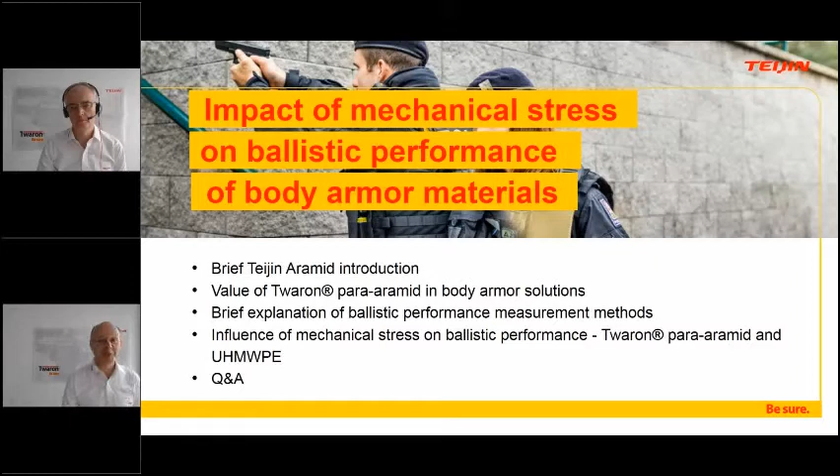Let's give you a brief overview of what Teijin and Teijin Aramid is. Teijin Limited is a technology-driven Japanese group listed on the Tokyo Stock Exchange. It's more than 100 years old, with more than 20,000 employees, and generated a revenue of about $8 billion in the last fiscal year. Teijin Limited focuses on two areas: the first is healthcare, and the second is materials. Materials being resins, composites, plastics, and fibers. When we talk about fibers, it's polyester, carbon, and different aramids.

This leads to Teijin Aramid, a 100% subsidiary based and headquartered in the Netherlands. Teijin Aramid has 1,800 employees working from 8 sales offices worldwide. We have 6 production facilities in Europe and Asia, and 5 R&D facilities globally. Teijin Aramid is focusing on 4 main markets: safety and life protection, you heard about that before, automotive, industrial, and aerospace.

We have a portfolio of 4 different high-performance products. Technora, a para-aramid, is produced in Japan. Then we have Teijinconex, a meta-aramid fiber produced in Japan and Thailand, used in flame and fire-resistant applications, for instance military pilot coveralls, tank crew garments, police anti-riot suits, firefighter garments and so on. Then the third product is Endumax, an ultra-high molecular weight polyethylene used in ballistic applications. And then Twaron is a para-aramid fiber, produced in the Netherlands from monomer to filament, which is quite unique. Twaron has been commercially available since 1986.

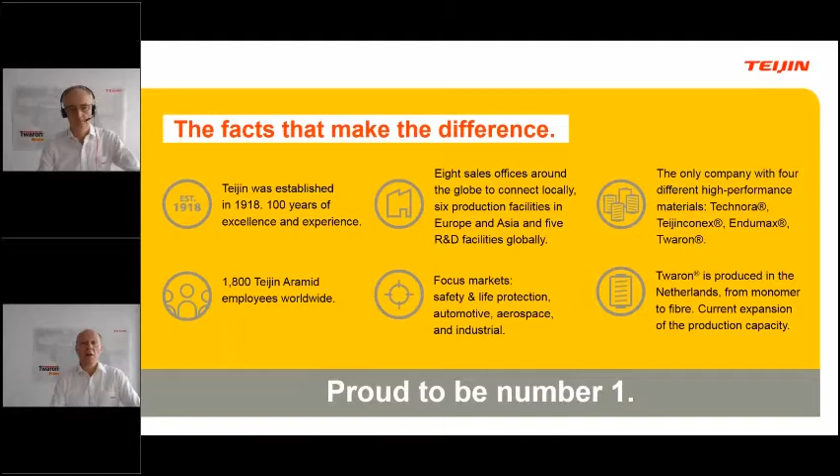The production capacity has been increased, and right now we are increasing the capacity by another 25%. Twaron is really proud to be number 1. Over the last 3 decades, Twaron has proven its reliable performance in soft and hard ballistic applications.

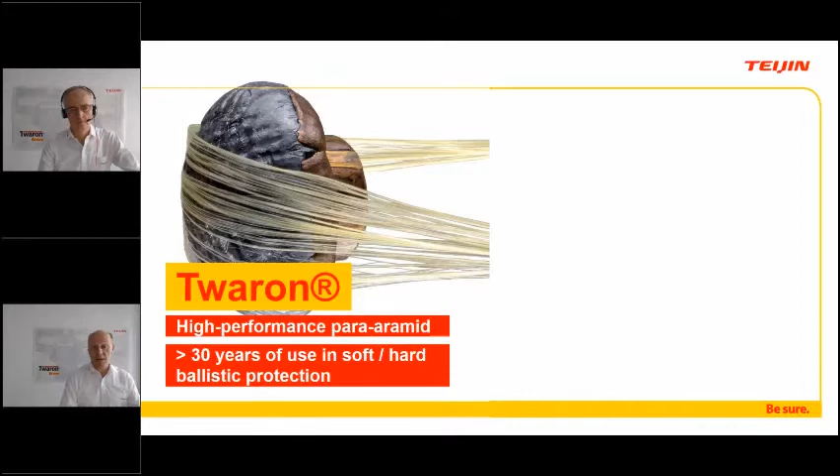It has a combination of unique properties, and I'm talking here about a few. It is extremely strong. If you compare Twaron with steel, for instance at the same weight, at equal weight, Twaron is 5 times stronger than steel. Twaron has a very good, stable performance over many, many years, and it is very resistant against heat, cut, and most chemicals.

This combination of properties makes Twaron an ideal material for body armor. It's this lightweight and high flexibility which gives the wearer, such as police officers and soldiers, a lot of mobility and comfort. And if you put together the lightweight, the flexibility, and the stable performance, you have the key criteria which create a lot of acceptance by the wearer, that's to say the police officers and soldiers wear their body armor. And we all know, only body armor which is worn can protect.

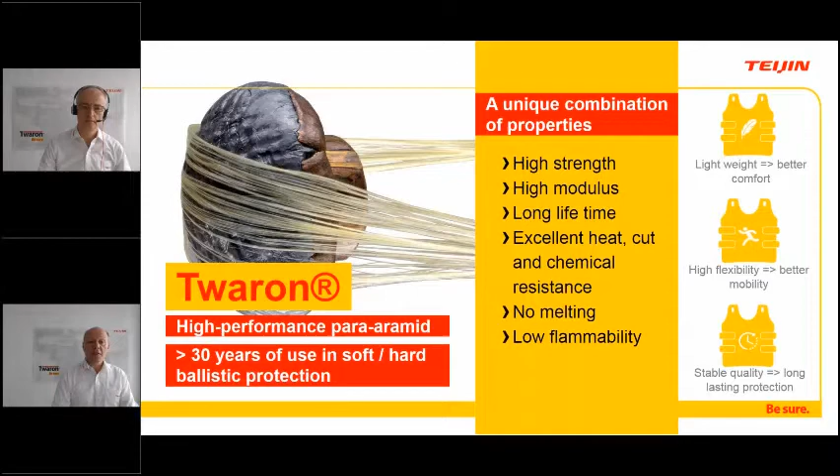After this short overview, I would like to give now the platform to Christian, who will cover the technical part. Christian, the floor is yours.

Thank you very much, Nicola, and hello everybody. I will first start giving you an overview about the test methods we at Teijin apply and the analysis tools we use in order to judge the ballistic performance of materials, but also to judge the safety margin of ballistic constructions.

Just a second. Okay, here we are.

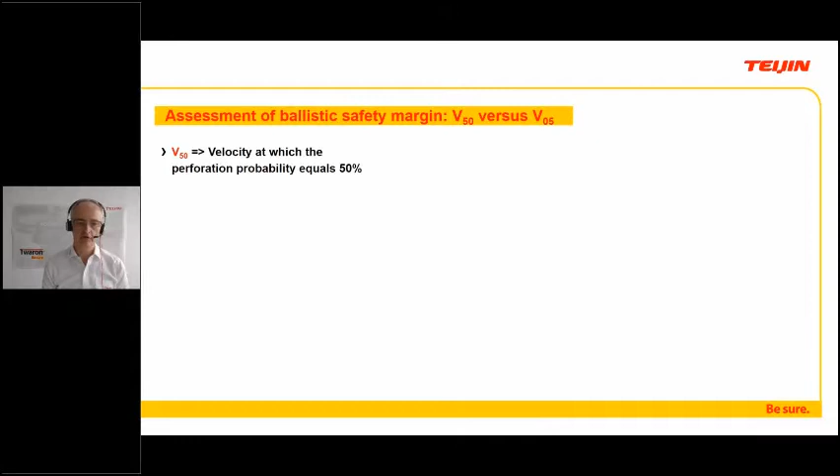Most of you have already heard about terms such as V50. For those who haven't, V50 is the velocity at which the probability for a complete perforation of a projectile impacting a ballistic construction is 50%. This we consider an ideal measure to judge the pack-specific energy absorption, and it allows us to compare the ballistic capability of different materials against each other.

Some people would also use V50 as a value to judge the safety margin of a ballistic construction, but that's not what we do. That's not what we consider appropriate. For safety margin of a ballistic construction, we consider the V05 to be the better value. The V05 is the velocity at which the probability for a complete perforation, so that the impacting bullet would perforate the armor, is only 5%.

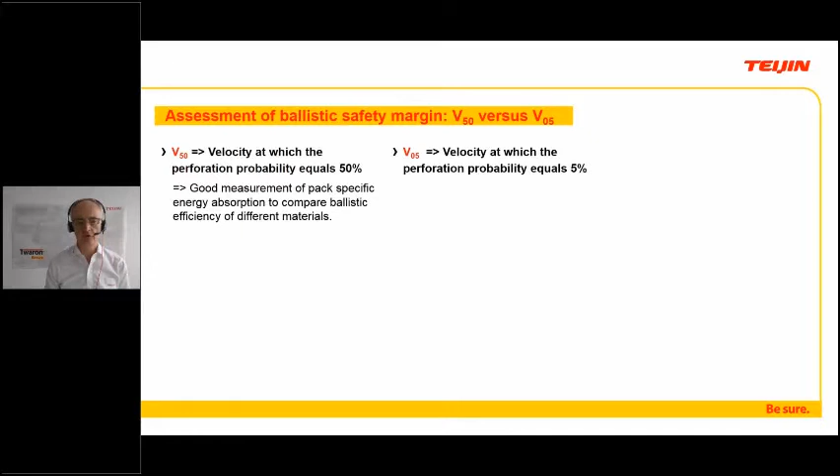In order to have a good safety margin, or at least a sensible safety margin, we suggest, in line with what is written in the NIJ standard, that the V05 should be higher than the VREF max. The VREF max is the velocity specified in the test standard. As an example, the German police standard requires a 9mm bullet to be shot at 415 meters per second, with a plus tolerance of 10 meters per second. So the 415 is the reference velocity, and 425 would be the VREF max. So in order to have a sensible safety margin, your V05 should be higher than 425 meters per second.

So with this, we conclude that the V05 is a better indicator for the safety margin than V50.

In order to follow the presentation, there are a few other terms I need to explain, which I'm going to use. That is the VLCP, the lowest velocity at which full perforation occurred. Then there is the VHPP, the velocity at which the highest partial perforation occurred.

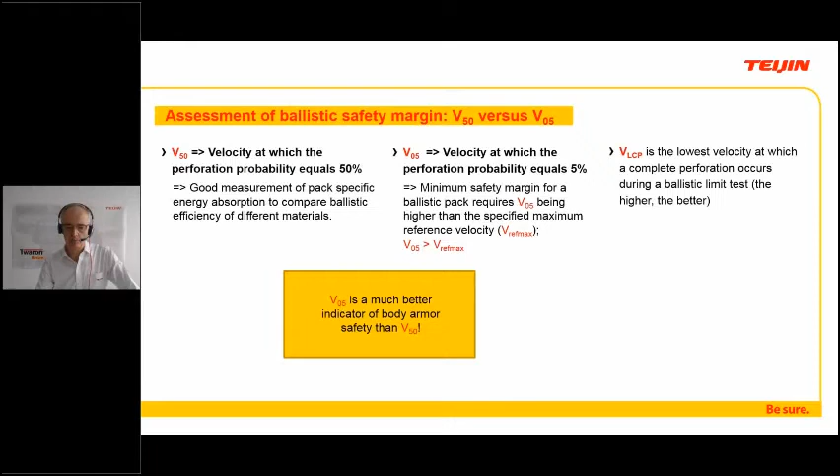Anna, if you can hear me, I have difficulties to navigate.

So the VHPP is the highest velocity at which a bullet has been stopped by the armor. And then there is a zone of mixed results, called ZMR, which is the difference between the highest stop shot and the lowest complete perforation.

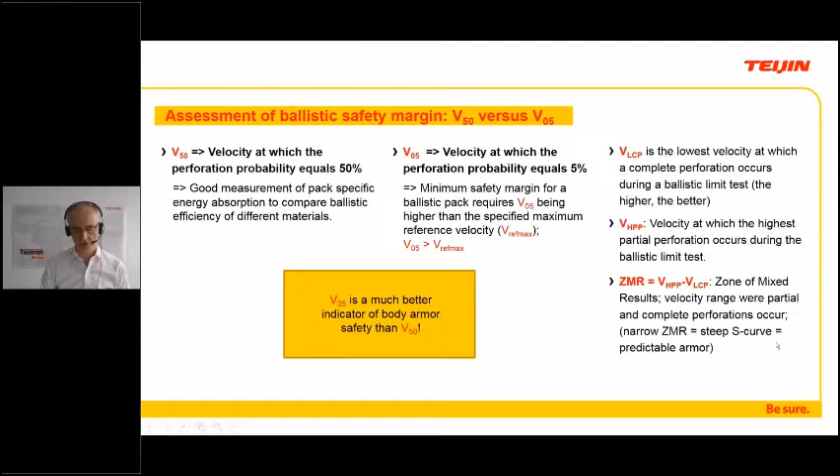In order to better understand, I'd like to illustrate this in a graph. On the x-axis, you see the velocity of the impacting projectiles, and on the y-axis, the perforation probability. The solid red line is your reference velocity, in case of German police 415 meters per second. The dashed line is your VREF max, which is 415 plus the tolerance of 10 meters, so the maximum velocity required by the standard.

If you now do a ballistic test, you only have two possible outcomes: either the bullet is stopped or the bullet is perforated. If you do multiple shots at different velocities, you would have a lot of bullets actually stopped by the armor, dotted in blue. Each blue dot here is one single shot, the stop shots are all dotted on the 0 line, and all the perforated projectiles are dotted on the 1 line.

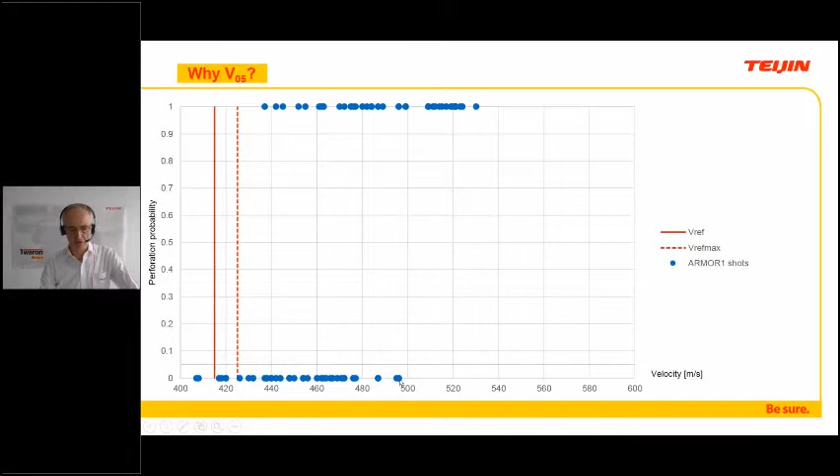In this example, shots were done from 410 to about 530 meters per second. Your highest stop shot has been around 495 meters per second, and your lowest complete perforation has been about 435. The difference between the two is your zone of mixed results.

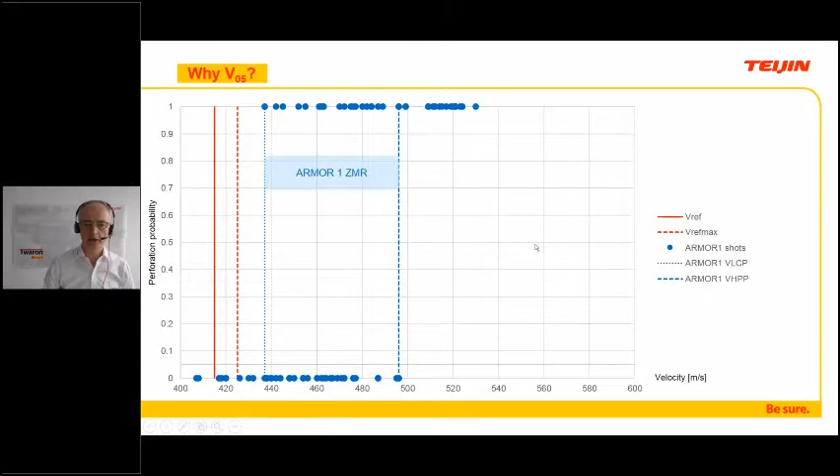What we can now do is, by applying a well-known statistical analysis tool called Logistic Regression, plot such an S-curve. This logistic regression is very suitable for such situations, and is also the system specified in the NIJ standard. From such an S-curve, you can derive different information.

The slope of this curve depends on the width of the zone of mixed results - the wider the zone of mixed results, the flatter your S-curve is. The quality of the S-curve depends on the number of shots you are doing - the more shots, the better your confidence in the S-curve.

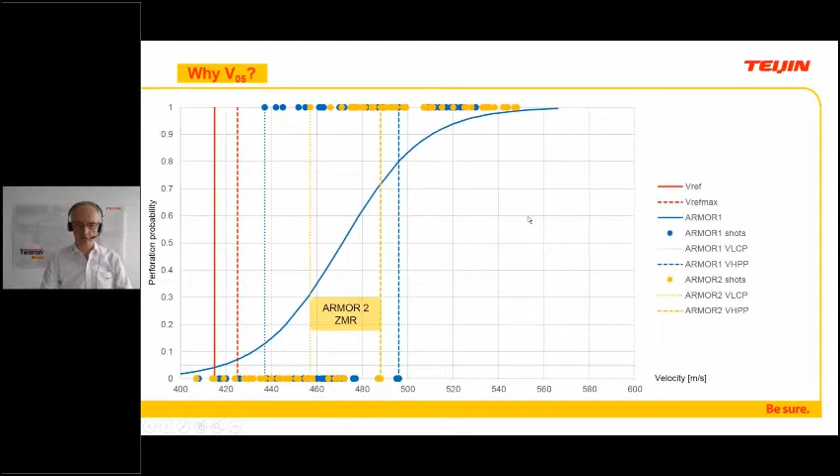Let's look at another example. In this case, we have yellow data points, and it all looks very similar. However, if you look at the zone of mixed results, you see that it is much smaller in this case, and as a consequence, the S-curve is much steeper.

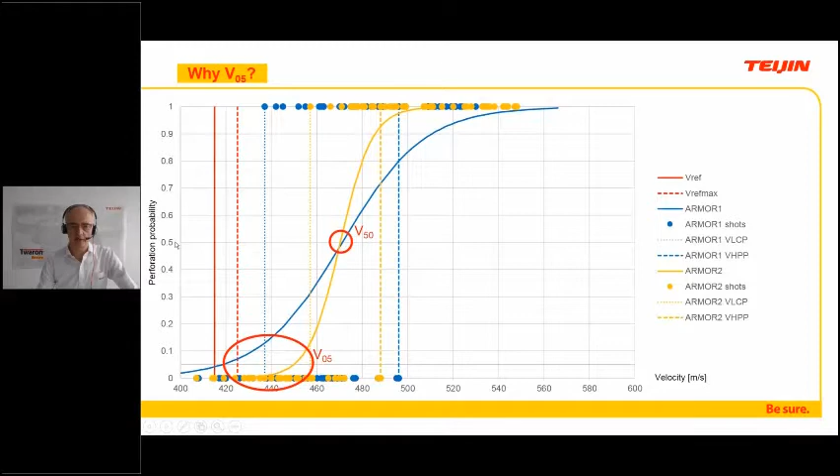So what kind of information can you derive from that? You can, for example, look at the V50, the velocity at which the perforation probability is about 50%. If you compare the two armors here, you would conclude that both are identical and have the same performance, because V50 is identical.

However, due to the S-curve, you can also look at the V05, and there you see, while comparing the two armors, a dramatic difference. In the blue example, the V05 is slightly below the VREF max, so you don't have enough safety margin. In the yellow example, however, the V05 is more in the range of 450 meters per second, substantially above the maximum reference velocity. So looking at the V05, you can see that the yellow example has a higher safety margin and is the better product for the person wearing the vest.

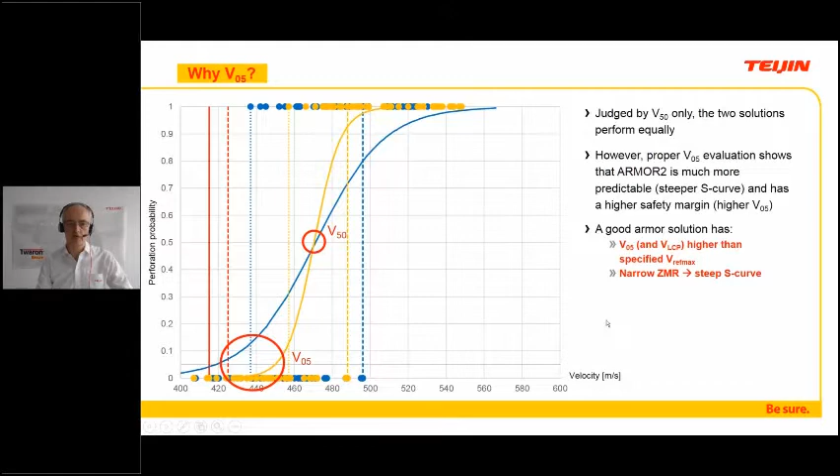Having all this in mind, we started to investigate and analyze the wear resistance, or the resistance against mechanical stress, of different ballistic materials. For this, we use the NIJ conditioning protocol, which asks to do a tumbling trial, a Tumbler test.

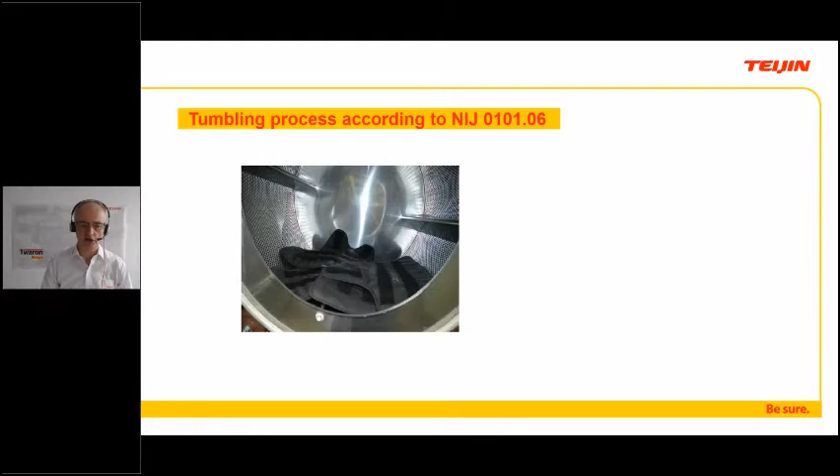So how does that look like? The Tumbler test is basically a kind of drum dryer where ballistic panels, a specified number of them, are filled in. The panels are, at least in our case, and I think that is standard, heat sealed in a pouch, and then additionally stitched in an outer garment in order to protect them as much as possible.

The panels are rotated in this drum dryer for 10 days, which is equivalent to 72,000 rotations. The conditions are 65 degrees centigrade and 80% relative humidity during those 10 days.

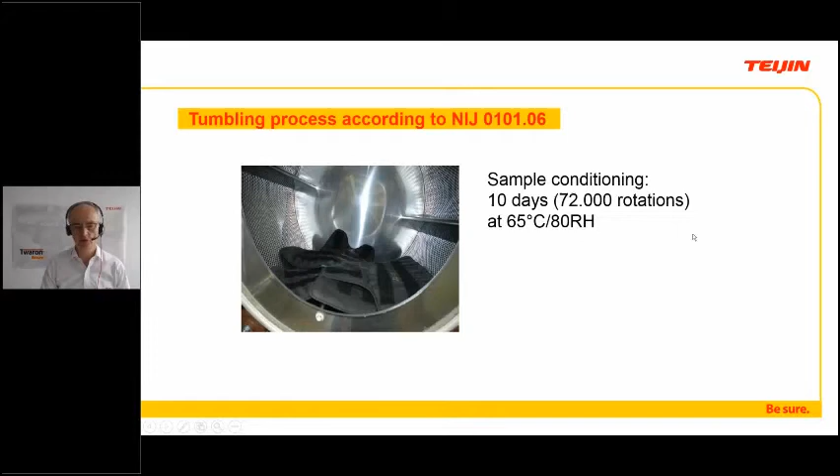So during the rotation, a lot of mechanical stress is applied, and this is how such a panel, in this case already removed from the outer garment, looks like after the 10 days of tumbling. You can see a lot of wrinkling and folding, mechanical stress has been introduced to the pack.

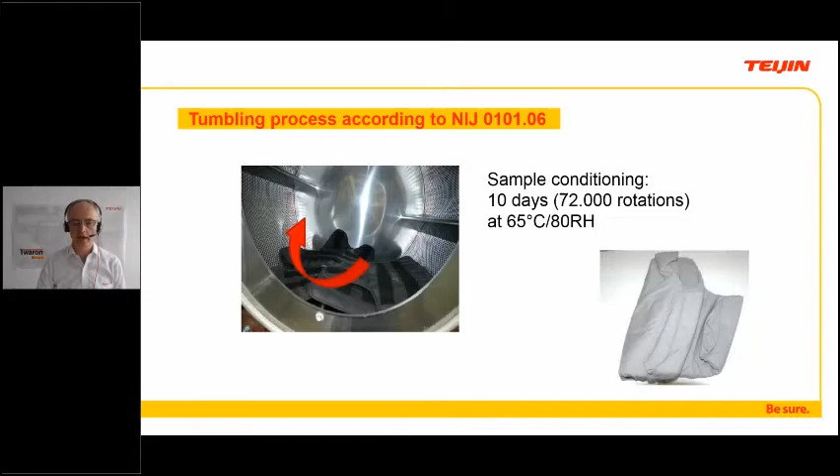What can happen, not necessarily does happen, but what can happen to the material, to the panel, due to this mechanical stress?

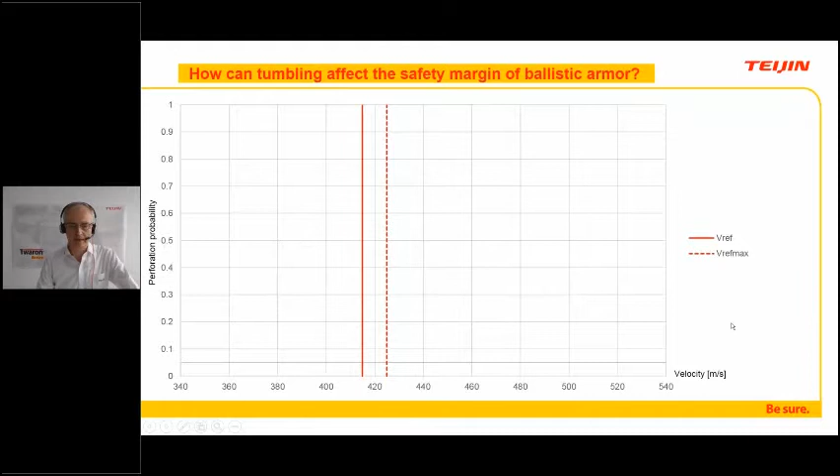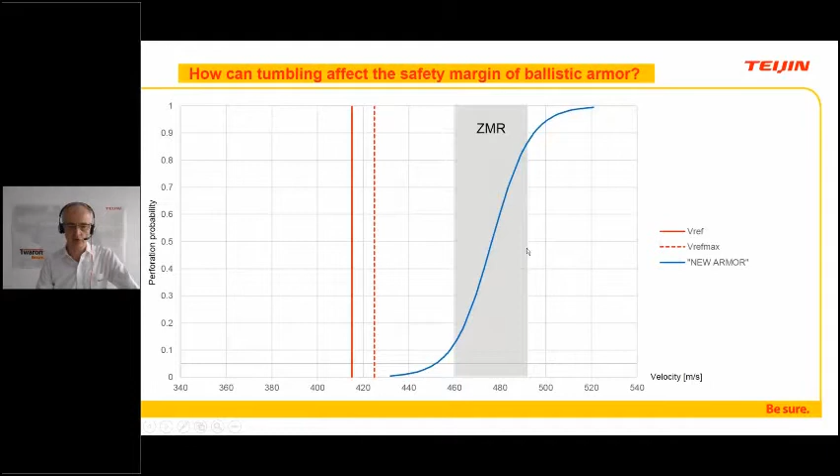This is a typical S-curve for a material prior to tumbling. You see a relatively steep S-curve and a small zone of mixed results. What we see from time to time is that this zone of mixed results substantially grows, because you happen to have lower velocity complete perforations here.

And if that is the case, then your S-curve after tumbling, which is now the dashed curve, substantially flattens, which means your V50 and your V05 substantially reduce. Not saying this has to happen, but this is what can happen due to the mechanical stress that is applied.

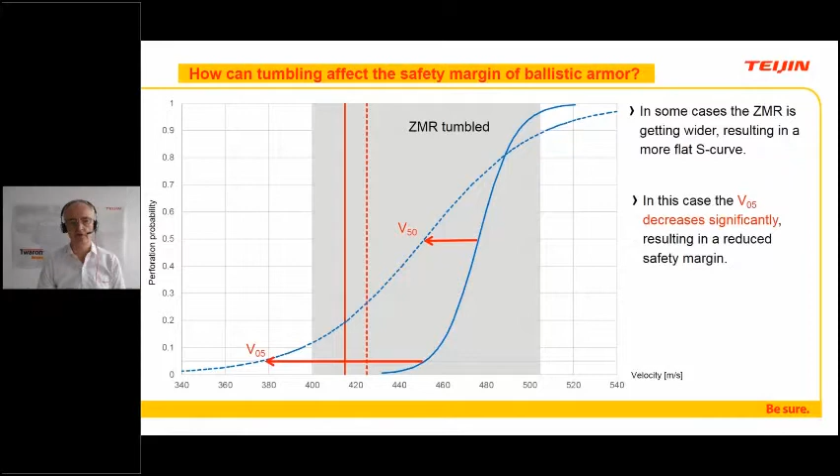Which materials did we actually investigate, according to this tumbling procedure? It was a Twaron woven fabric called CT612 - in this case we chose loom state fabric. We compared it with Twaron UD called UD25. And we included two types of ultra-high molecular weight polyethylene UD obtained from the market, both based on generation 3 ultra-high molecular weight polyethylene fiber.

Tumbling was done, as mentioned, in accordance with the NIJ 0101.06 standard. The ballistic test we did is an internal test method we described within Teijin Aramid. The projectile used is a 9mm DM41, a steel-jacketed 9mm round as specified by the German police, where the reference velocity is 415 meters per second and the VREF max is 425.

The analysis method we applied is logistic regression, as specified in the NIJ standard. In order to come to a good quality result, we tested each construction with 80 shots, using 10 panels with each panel shot 8 times. Based on our statistical analysis, we are convinced this gives us a good estimate on the V50 and also on V05 with acceptable confidence levels.

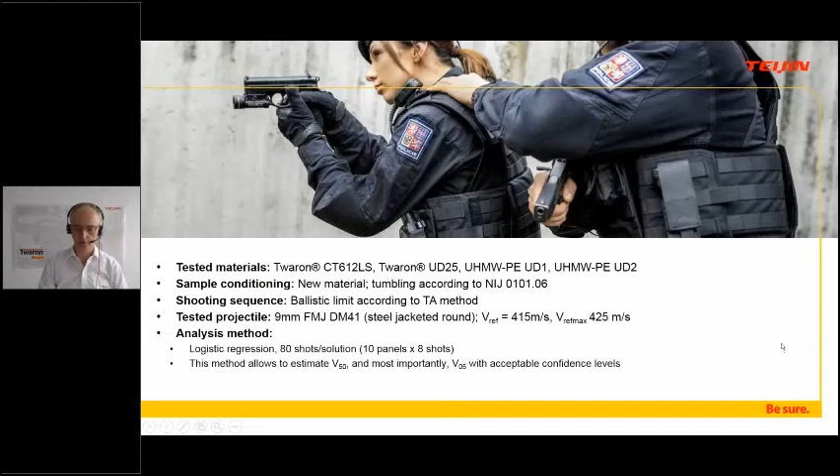Some extra information on the panel constructions. The CT612 loom state, a 125-gram plain woven Twaron fabric, was put in a 4.5 kilogram per square meter panel and has been quilted. The Twaron UD25, a 2-ply UD with 112 grams, was put into a 4.24 kilogram per square meter panel and has been corner tacked.

Both of the ultra-high molecular weight polyethylene materials we used were 2-ply materials put into about 3.9 kilograms per square meter construction and also were corner tacked. So you see some difference in the panel construction - while the Twaron woven fabric has been quilted, the UDs have been tacked.

This is because those are the most common ways to connect the layers when an integrator, a vest manufacturer, is producing a vest. For woven fabrics, especially loom state fabrics, it is very common to have them quilted, while for UDs quilting is not common at all, because it would dramatically stiffen up the pack, often to an unacceptable level, and would also have some impact on ballistic performance. So the panel constructions we used are typical to what is used in the industry.

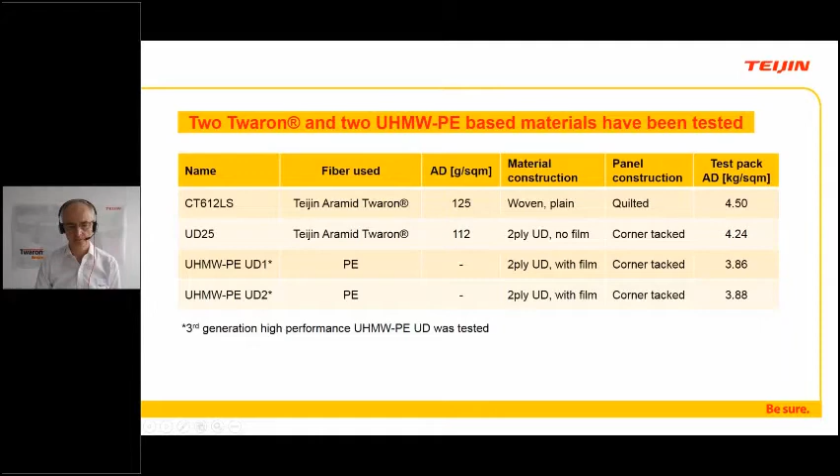So how do the different materials look like before and after tumbling? Two examples: here we have a comparison of the woven Twaron panel, new versus conditioned, so after tumbling. You see that due to the tumbling there's quite some stress provided to the panel, which you can see especially in the corner area, but the fabric construction is still very well intact.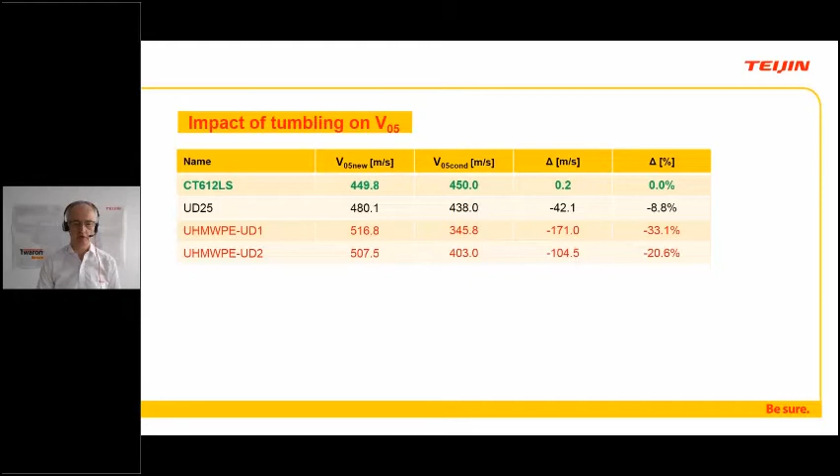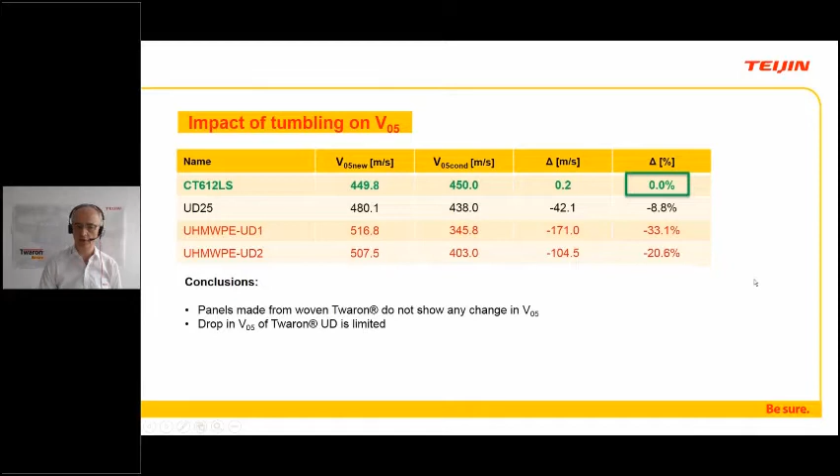Same analysis we did for the V05, the velocity where the probability for perforation is 5%. Again, in the case of Twaron woven fabric, the ballistic performance did not change at all, no impact due to tumbling. In case of the Twaron UD, a somewhat more pronounced drop in the range of close to 9%. And in the case of the two ultra-high molecular weight polyethylene UD materials, we saw a drop in V05 between 20 and 33%.

And even more so, the safety margin was substantially reduced, even below the reference velocity. You remember the reference velocity was 425, and the constructions we used, which are not certified solutions, had a V05 substantially above it, but suddenly they are substantially below the V-ref max.

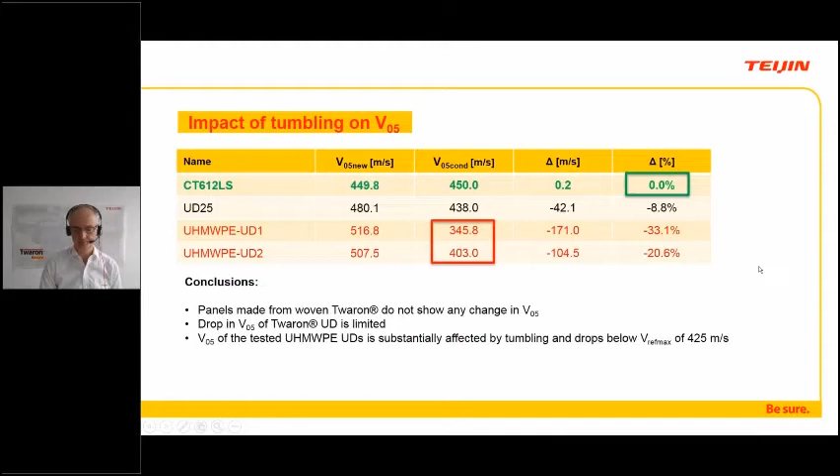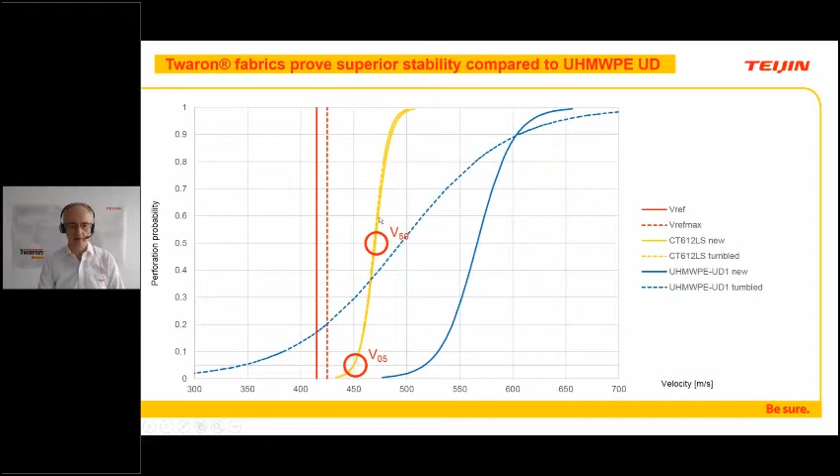In comparison, the woven Twaron panel has a steeper S-curve prior to testing. More importantly, the dashed line now, you can hardly see it because it is so close to the original line. The dashed line is exactly on top of the untumbled, unconditioned material. So the V50 and the V05 have not changed at all.

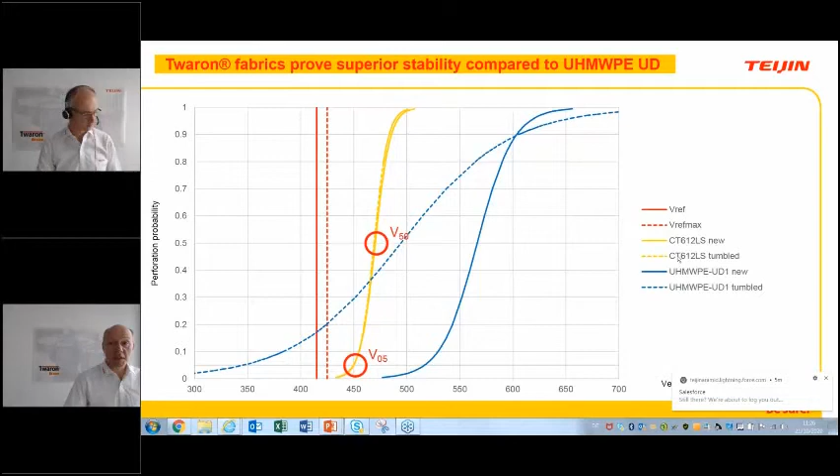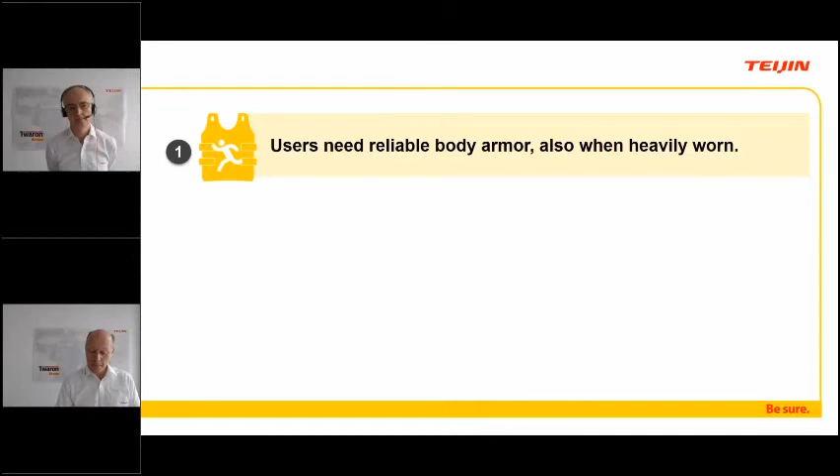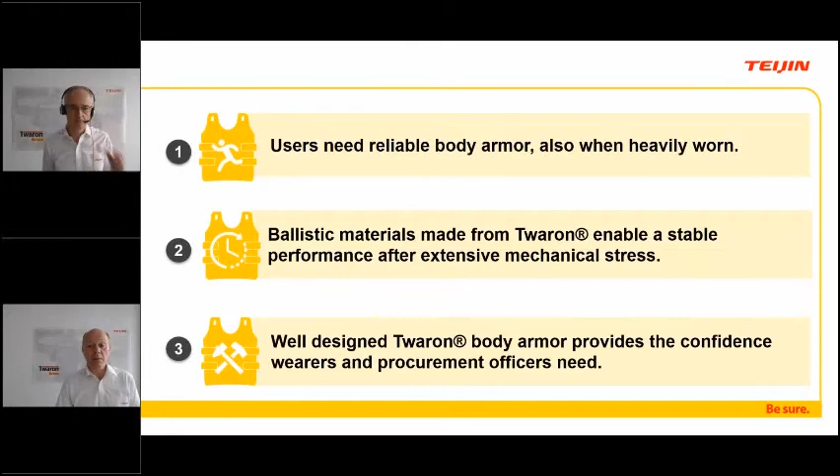Summarizing the results of this comprehensive program, we can conclude that wearers need reliable body armor. That's to say, soldiers and police officers need body armor which still performs when heavily worn. This comprehensive test demonstrates that ballistic materials made from Twaron enable stable performance even after extensive mechanical stress. So well-designed Twaron body armor provides the confidence wearers, but also procurement officers, are looking for. Twaron is a material of choice for reliable, comfortable body armor.

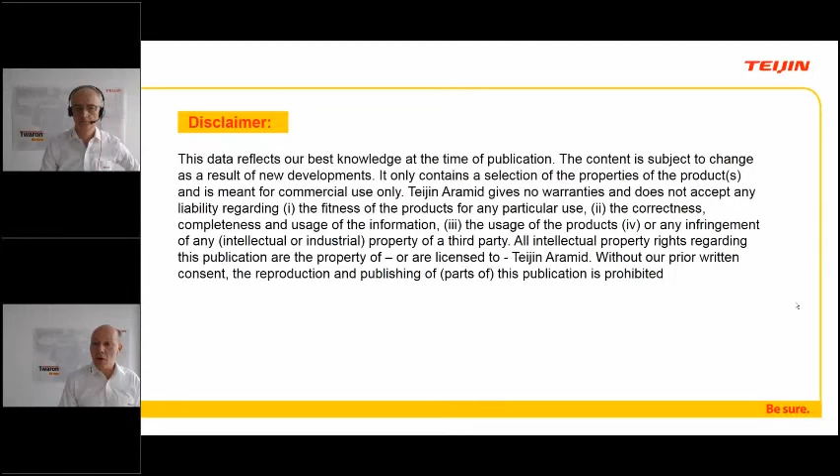You are talking about mechanical stress. However, the tumbling process involves heat and moisture as well, that's what you also mentioned in the presentation. Could these factors have a higher impact on the performance than the mechanical stress?

That's a very valid question, and I can very well imagine. We don't know for sure, but we can assume that the elevated temperature and the moisture provided to the panel support the stress applied mechanically during the tumbling. So we don't consider this a hydrolysis test, because to measure and analyze hydrolysis resistance, 10 days would for sure not be sufficient. That is why we consider it a mechanical stress test. However, it also depends on the type of material, because in UDs you also have resin systems, for example, which might be affected by the elevated temperature. So indeed, the moisture and the temperature applied will further support and increase the stress.

Okay, thank you. Another one here: why do you consider the Tumbler test a relevant test?